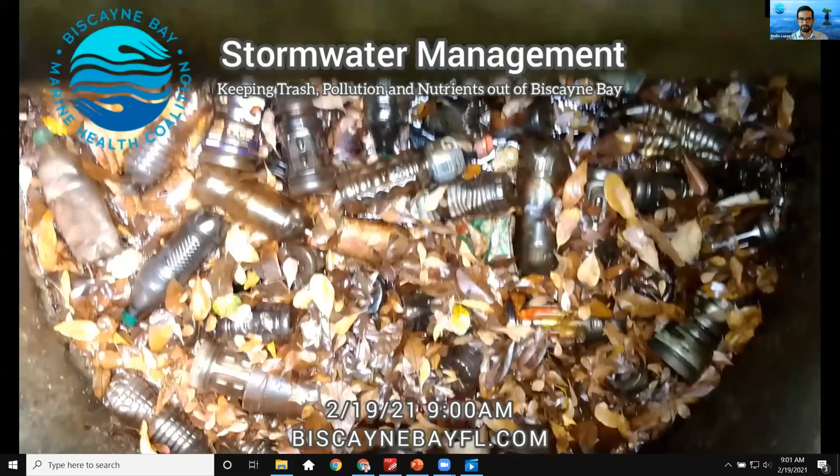So everybody knows, Dave and I started working on this a couple of months back, and we started speaking with all of the different panelists that you'll see today. I'm going to stop sharing this video in just a second, but I wanted to keep it out there because a picture is worth 1,000 words, right?

These are actually local storm drains. I took this video myself, just walked up to some of these drains, just to give a quick sense of what we're talking about, some of the things that we can actually see ourselves. A lot of the contaminants that get into our stormwater systems and eventually discharge into Biscayne Bay, we cannot see. But these are the things that we can see.

Something that's a curious thing that I wanted to highlight with these videos is that a lot of what gets into the storm drains is actually organic matter, like leaves for example. You're seeing a lot of plastics and trash in there, but there are a lot of leaves. And that also contributes to pollution in the form of nutrients, right? That's not supposed to be in the bay. But we're going to get to all of that in just a second.

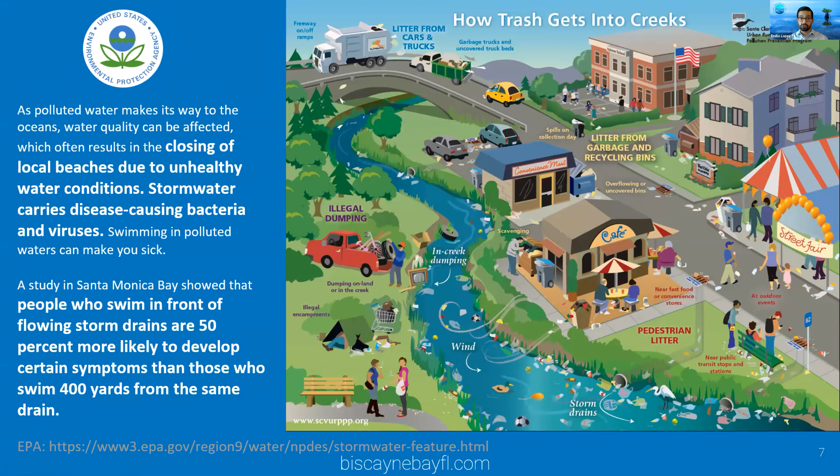We know that it comes from a lot of different sources, right? It causes a lot of different issues. I'm going to assume that most of you know a lot about this, so we're going high level here. Another very important thing is that a lot of the trash is in the oceans. We all know about this, we talk about it, we see these dramatic images of fish that have plastics in their gut. We know that humans are consuming that as well.

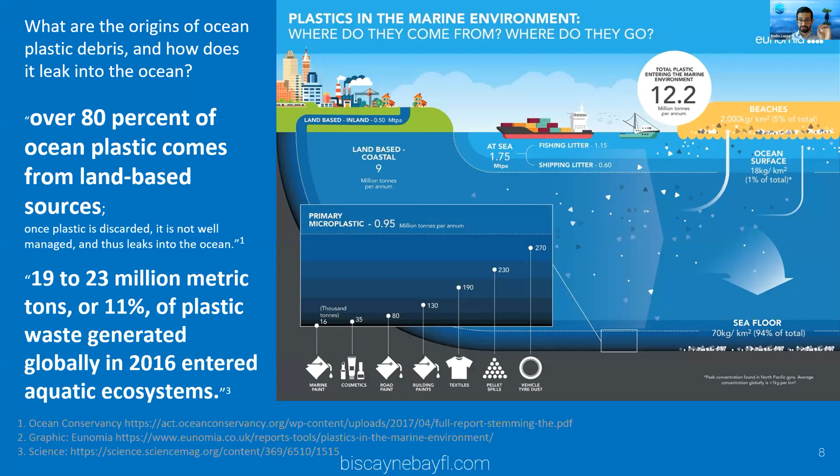A lot of it comes from land, right? And in a way that's an opportunity, an opportunity that we have to address the problem on land. 80% of it, this is only talking about plastics. I know it's a narrow focus of this slide, but that just gives you a sense of the issues.

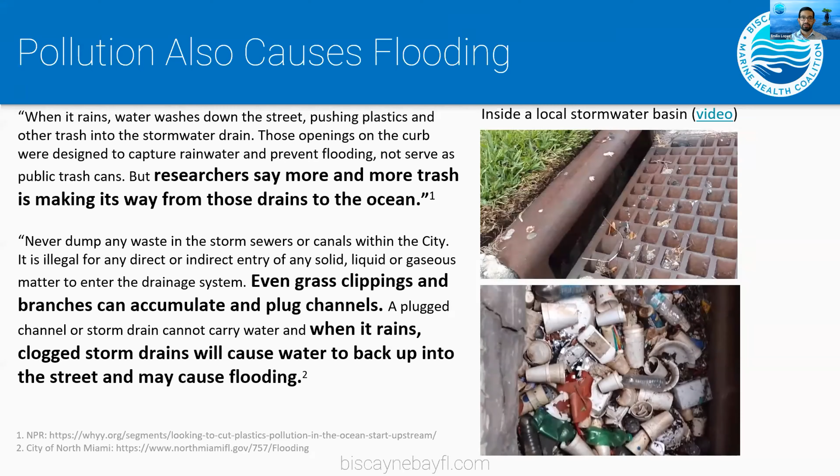We also know that this trash and litter clogs up the pipes and it leads to flooding. One of those quotes you see down there in bold is from the City of North Miami website. This is a very, very well documented issue, that pollution is not only an issue from a health perspective or ecological perspective, but also financial and other impacts like flooding.

Like I mentioned before, a lot of what we capture is leaves, nutrients contained in there. There's also a lot of street litter. If you were to quantify per inlet, very rough estimate, we're talking over 100 pounds of trash every single year for each one that's going in there, trash and also debris like leaves, which again is a problem. If we look at 95,000 plus storm drains in the county, we're talking about potentially 16 million pounds of leaves and trash entering the storm drains.

Not all of that gets out into the bay. Not all the systems are connected to the bay, but this gives you a sense of the magnitude of the problem. And if you break this down using the Florida DEP nutrient load calculator, this represents a lot of phosphorus and nitrogen, many pounds of that. That's very important, you'll hear why pretty soon.

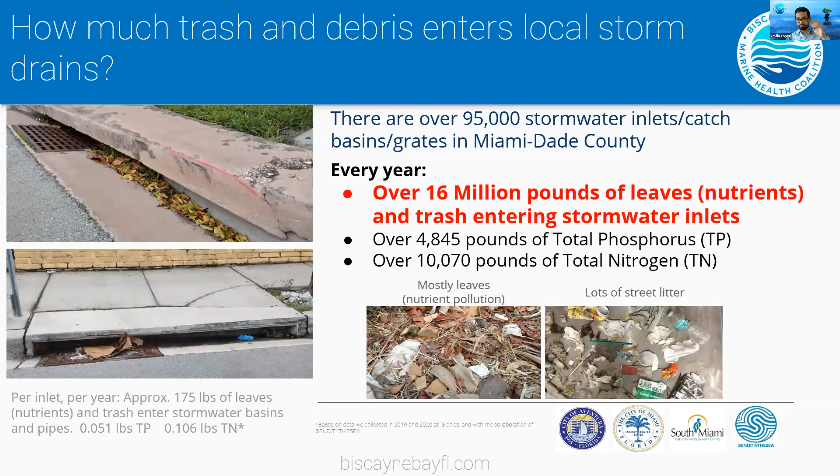We know that we have a moral responsibility to protect the bay, and public works officials also have an opportunity because they can have a lot of impact in order to do this, and they want to do this. When I talk to public works folks, they know about the problems, they want to address them.

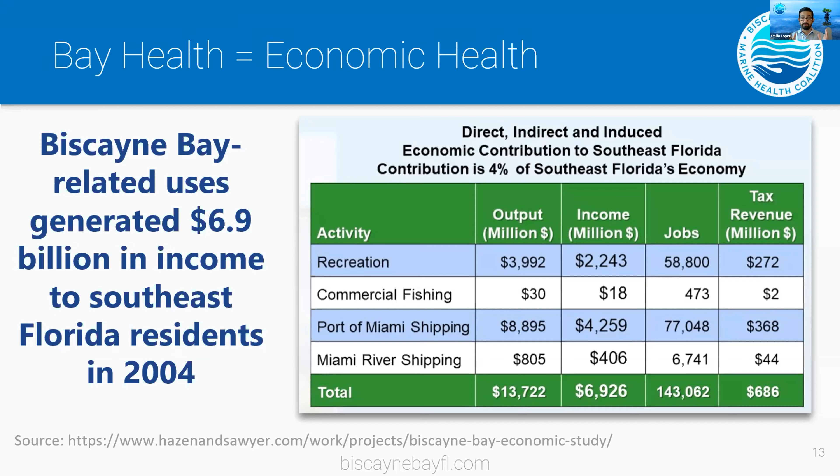Another reason why this is important is because for us, Biscayne Bay is the driver for our economy. This is a very old study, from 2004. Look how many billions of dollars we're talking about, we're talking about a lot of jobs. So when you think about protecting Biscayne Bay, it's not only about human health, it's not only about environmental health and our ecology, local ecosystems, it's not only about having fun. It's about protecting our jobs. It's a very, very vital part of our economy.

And what are some public works departments saying? Six months ago, before a town hall which we did via Zoom for the coalition, I asked public works departments via a very brief survey what are some things that you would like to take action upon from the Biscayne Bay Task Force recommendations during the next 12 months. And you can see here from the responses that public works departments want to take action.

Okay, very action focused. You see highlighted in red, these are two of the, I think, 62 different recommendations from the Biscayne Bay Task Force at the county level that got a lot of little check marks there. That's public works departments saying that we definitely want to take action on these things as well as the others.

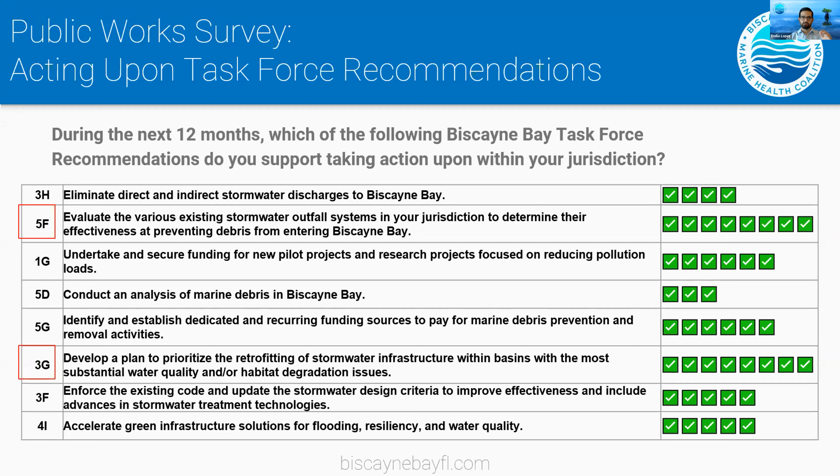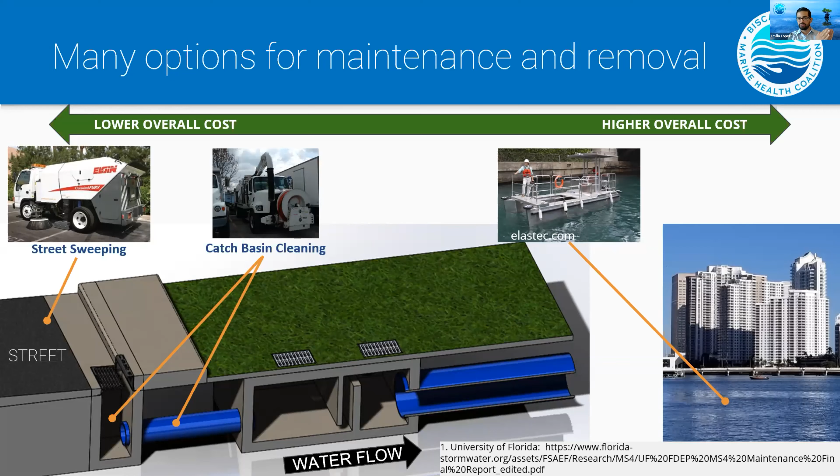Not all the systems discharge to the bay — I want to make sure everybody understands that. This isn't a representation of all the different maintenance practices, but in general, the closer to the street, to the source, that you're able to capture this trash, the cheaper it is, the more economical. The further out you go, the more expensive. There are many different solutions.

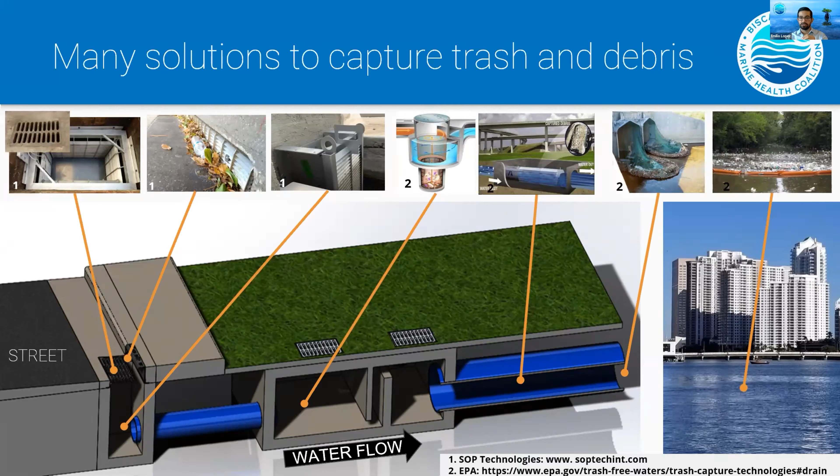Some solutions are intended to keep the trash at the street so you can capture it at a much lower cost. For many reasons, you want a variety of solutions, and you'll hear that from public works departments. These solutions are out there so you can capture and remove trash at various points. I'll go through this quickly.

Another important thing is that locally, there are many organizations supporting the protection of Biscayne Bay. So if you're a public works official asking where's the support, who is supporting me in making these investments and taking this action — there are many groups. You can visit our website, where we have a listing of several of them with contact information, so you can connect with them and be supported, because we are supporting.

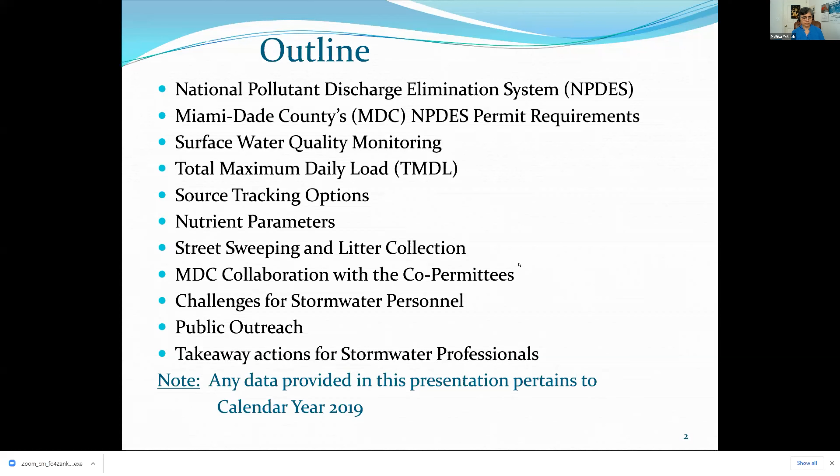The NPDES permit is issued by the Florida Department of Environmental Protection, FDEP, and FDEP is the regulator. Miami-Dade County is not the regulator. The permit is issued to Miami-Dade County and 32 co-permittees. The co-permittees are the municipalities, FDOT District 6, MDX, and Florida Turnpike Enterprise. City of Miami and Hialeah have their own permit. Each co-permittee submits their NPDES annual report directly to FDEP.

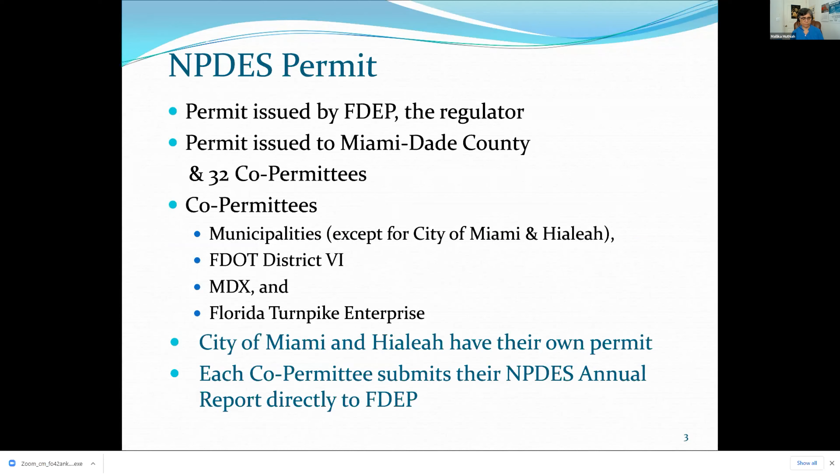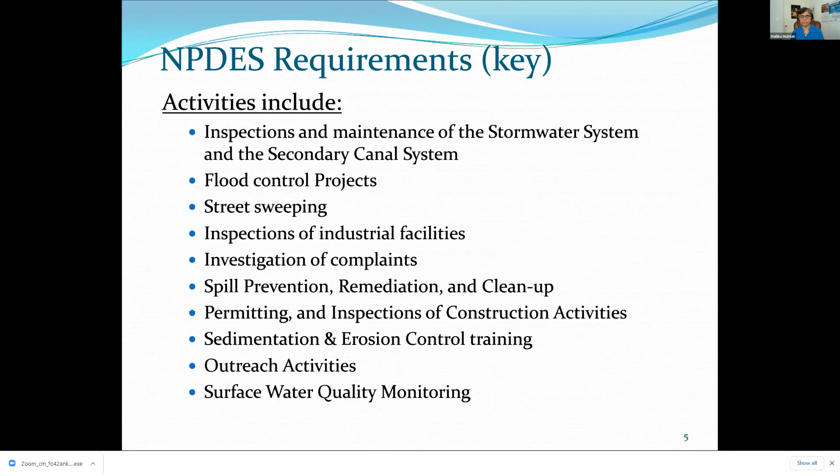In the county, NPDES activities are primarily performed by the Department of Regulatory and Economic Resources, RER, Public Works, Water and Sewer Department, Solid Waste Management, the Parks Department, and Florida Yards and Neighborhood. The permit activities for the NPDES permit include inspections and maintenance of the stormwater system and the secondary canal system, flood control projects, street sweeping, facility inspections, complaint investigation, permitting and inspections of construction activities, sedimentation and erosion control training, outreach activities, and surface water quality monitoring.

These are the stormwater structures that can be found in Miami-Dade County. Maintenance activities are performed by Public Works. Engineering, planning, and inspections are conducted by DERM.

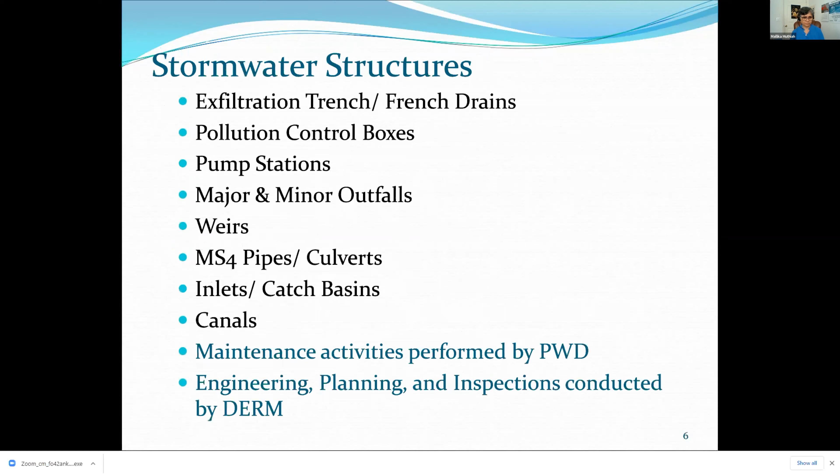The stormwater infrastructure is inspected annually after storm events and for complaints. The following maintenance schedule is followed unless an inspection finds an immediate risk after storm events: French drains, trenches, catch basins, inlets, and drainage pipes are on a 3 to 5 year cycle. Outfalls are maintained on a 1 to 2 year cycle. Pollution control structures are maintained annually. Secondary canals are maintained with 4 cycles per year, and pump stations are maintained weekly.

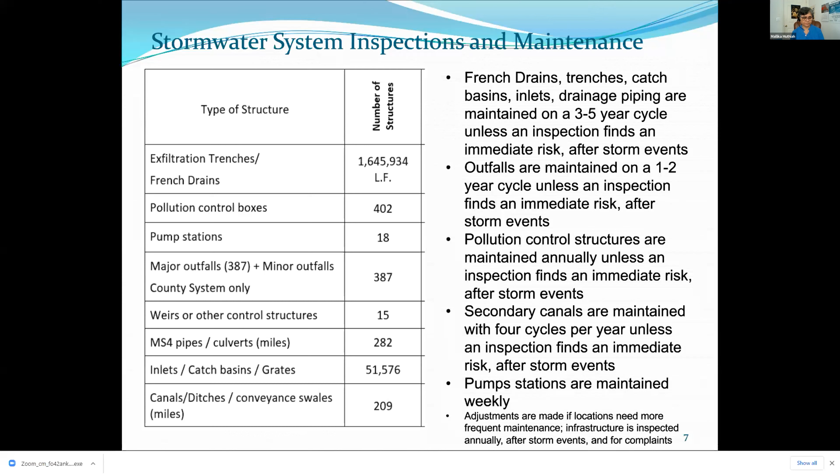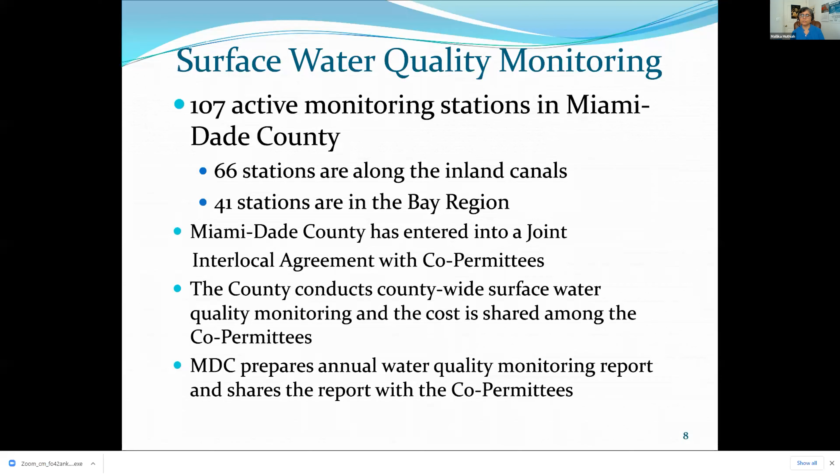There are 107 active monitoring stations in Miami-Dade County. 66 stations are along the inland canals, and 41 stations are in the Bay region. The county has entered into a joint interlocal agreement with the co-permittees. The county conducts county-wide surface water quality monitoring, and the cost is shared among the co-permittees. The county prepares an annual water quality monitoring report and shares the report with the co-permittees.

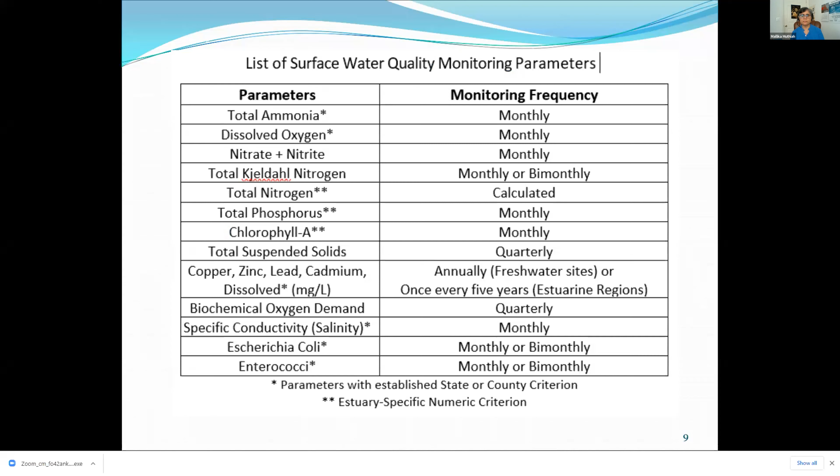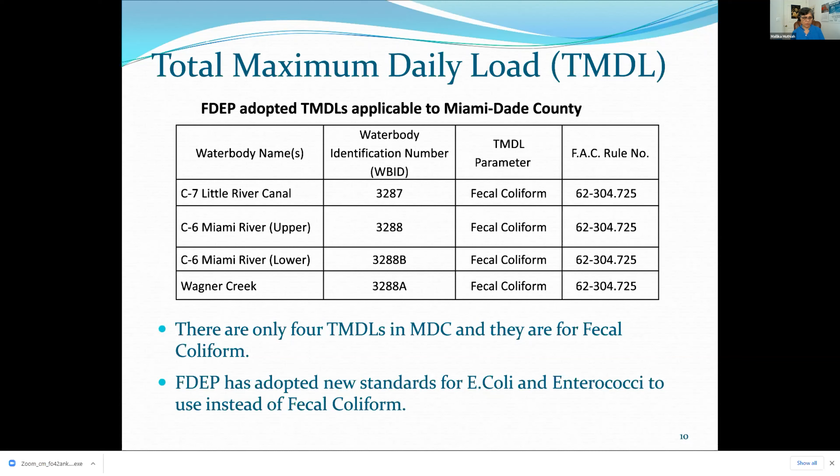What do we do when we find high concentrations of a pollutant detected in a water body? The source of pollution must be identified and then eliminated. There are a few options available, and a combination of these options will be better.

Walk the outfall. Walk close to the water body and visually observe if there are any illicit discharge pipes to the canal or other potential sources of the pollutant. In the neighborhood, observe if there are any notable odors, outdoor markets or produce packing facilities, homeless population, open garbage dumpsters, birds, restaurants, medical facilities, or any facilities out of the ordinary that may be a potential source of the pollutant. Direct or indirect runoff from certain sources could cause pollution.

Additional water quality monitoring of the discharge points, the outfalls. If sampling results indicate high concentration of a parameter, continue upstream and collect samples in the stormwater structures. If you still find high concentrations, continue upstream until the pollution source is located.

Use GIS drainage maps. Source molecular is a DNA testing method for bacteria pollution, used to identify if the source is human, animals, birds, etc. Closed circuit television CCTV monitoring can also be used to look for damaged pipes, illegal connections, and cross connections between sanitary sewer and storm sewer.

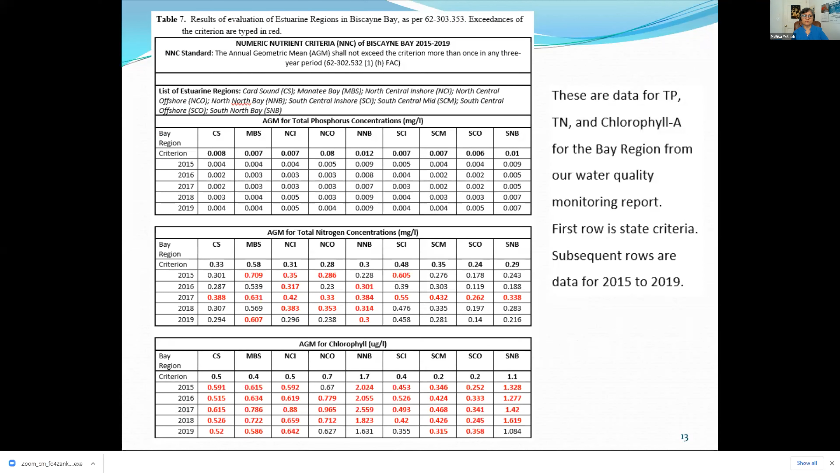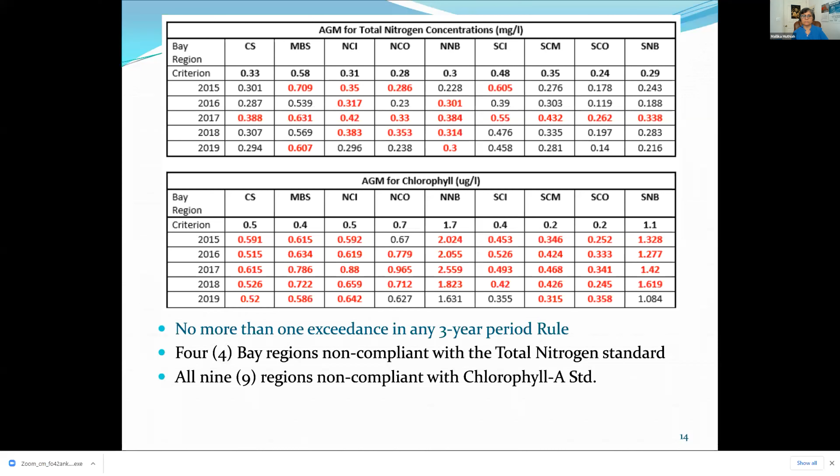This is the table for total nitrogen and chlorophyll A. No more than one exceedance in any 3 consecutive years is the rule. There are 4 Bay regions that are non-compliant with the total nitrogen standard, and all 9 regions are non-compliant with the chlorophyll A standard.

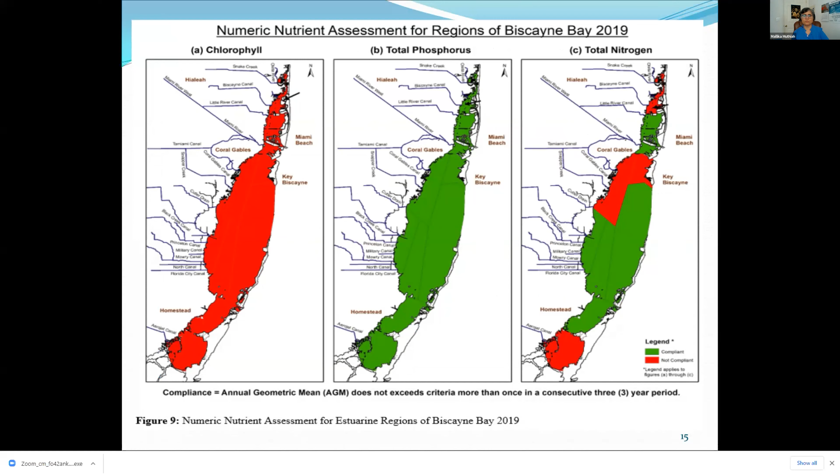These figures indicate numeric nutrient assessment: the first one is chlorophyll A, the second one is total phosphorus, and the third is total nitrogen.

Trash and nutrients must be captured prior to entering the bay. The most economical option is not to let trash and debris get into the bay.

Litter collection and litter control is performed under contract through the Parks and Open Spaces Department. The roadways contract deals with medians, roadside curbs, and swales. They maintain 1,060 miles, 20 cycles a year, with 780 cubic yards of litter collected.

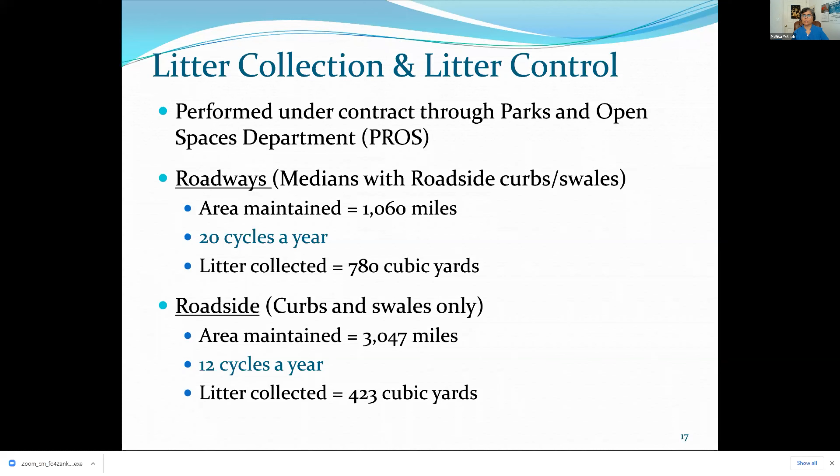The roadside contract is for curbs and swales only. Area maintained is 3,047 miles, 12 cycles a year, with 423 cubic yards collected.

Miami-Dade County collaborates with the co-permittees. The surface water quality monitoring data and report are shared with the co-permittees. The county compiles facility inspections, complaint investigation, and enforcement related information and provides them to the co-permittees for use in their annual report. The county also organized a co-permittee meeting with FDEP staff as the guest speaker prior to obtaining our current Cycle 4 permit.

The county shares sample documents and responds to questions from the co-permittees regarding NPDES requirements. It also shares public outreach brochures.

The challenges we face as stormwater professionals include public awareness and excessive water and fertilizer use for landscaping. Switching from septic systems to sanitary sewer connection may be costly. Identification of the specific source of pollution may be difficult and expensive. Deteriorating infrastructure may cause sanitary sewer overflows.

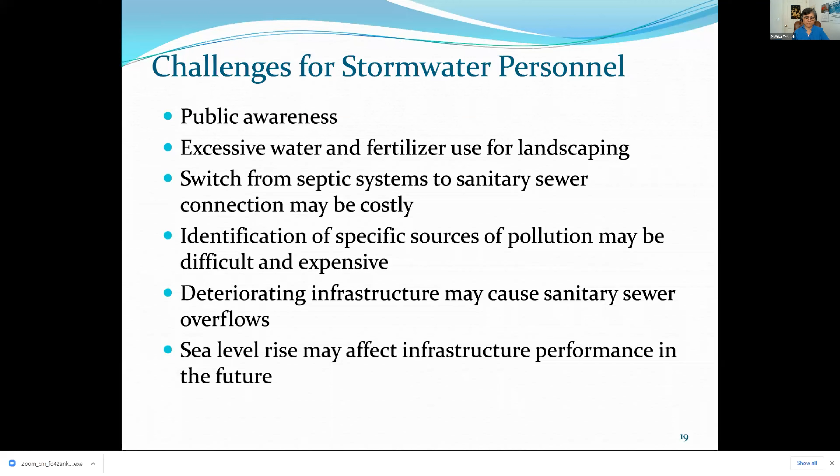Sea level rise might affect infrastructure performance in the future. Involvement of multiple stakeholders means progress. It is important and will help in better understanding the sources of pollutants, and it enhances environmental awareness and responsibility.

So what are the takeaway actions for us? Enhance street sweeping operations, enhance stormwater infrastructure inspections and maintenance, allocate funds and incentives to facilitate switching from septic systems to sanitary sewer connections, apply source tracking methods to facilitate identification and help eliminate pollution sources, reduce the number of sanitary sewer overflow incidents, promote low impact development and green infrastructure.

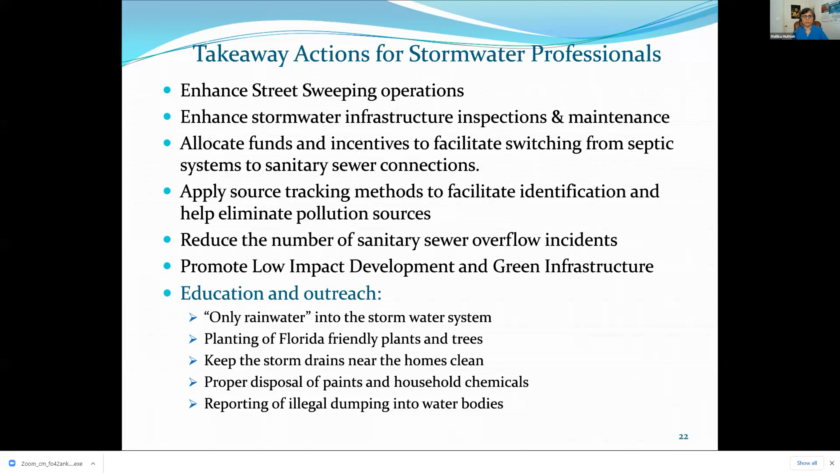With regards to education and outreach: only rainwater into the stormwater system, planting of Florida friendly plants and trees, keep the storm drains near the homes clean, proper disposal of paints and household chemicals, reporting of illegal dumping into our water bodies or stormwater structures.

Other information is available for flood complaints. Call the Water Management Division at 305-372-6529 or email swu@miamidade.gov to report illegal connections, dumping of any liquid or materials into storm drains or water bodies. Call the Environmental Complaint Desk at 305-372-6955 or email environmentalcomplaints@miamidade.gov. That concludes my presentation, and I appreciate the opportunity to present these slides. And thank you very much. Be safe and well. Thank you, Mallika.

Very much appreciated. So in the questions and answers section from the participants, there's one question that really rose to the top, a lot of people gave thumbs up to it, so I wanted to ask you and get your thoughts. Since plastic pollutes from the time it is produced, not just when it is littered, is Miami-Dade County going to pass more policies that will reduce the amount of single-use plastics and polystyrene foam used, distributed, or sold?

That needs to be dealt with at a very high level. And I am very happy that we have a chief bay officer to handle these issues. But it's a very important question. It is done in several municipalities and other areas. I would be very happy to see something like that. Maybe our chief bay officer can help us with this question.

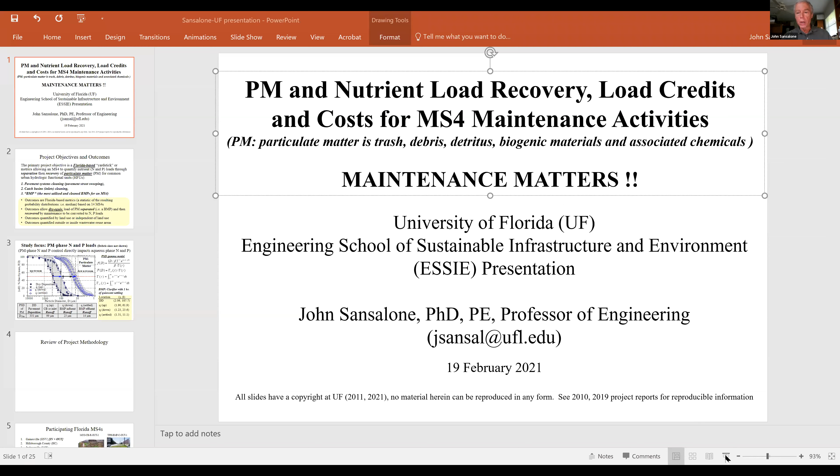Okay, can everyone see my screen? Not at this moment, huh? So what do I need to do on my end? On the bottom it should say screen share, and then you can select either a specific app, or you can just share your entire screen, which is probably the easiest thing to do. No, when I do this now, I get who can share and who can start sharing. Hold on, hang on, let me go through it this way. Okay, I'm seeing something happening. It looks like, okay, yes, now we can see it. All right, good, good, good, good. All right, I'm gonna go to full screen here. All right, so

My introduction today is mainly about the science of maintenance that has been such a critical discussion today. I'm going to talk about particulate matter and nutrient load recovery, load credits, and cost for maintenance activities. I'm abbreviating and lumping everything as PM, particulate matter. This includes trash we've seen in the pictures, debris, detritus, biogenic material, leaves, grass clippings, etc., and critically, all of the associated chemicals. Here our focus is nutrients. I want to put the summary up front, and the summary comes down to two words: maintenance matters. In this presentation, I'm going to document that, especially from a cost point of view.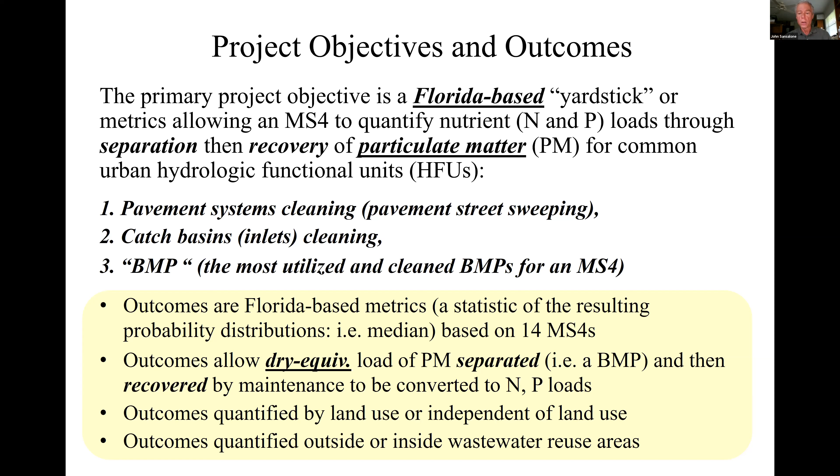But the point is, especially for nitrogen, if you are able to recover that particulate matter upstream through pavement cleaning, you have done yourself a significant favor before it ever enters the stormwater system, or before you have to clean it out of a best management practice. Frankly, many of the best management practices we deal with are certainly not best. They're poorly managed and they're poorly practiced.

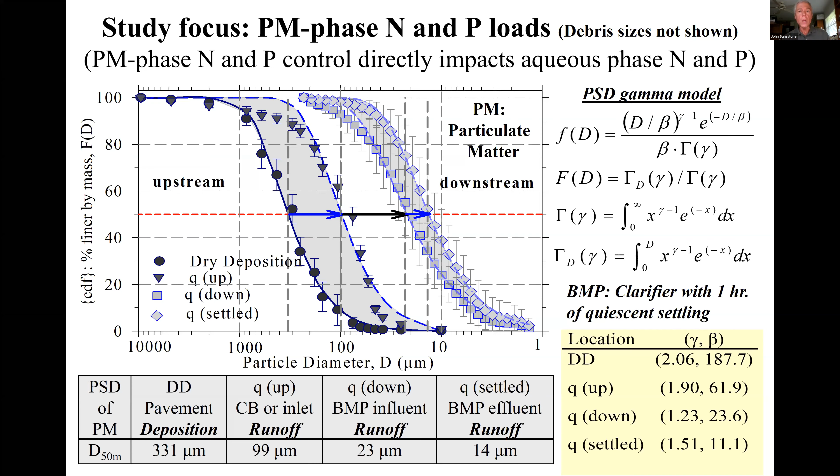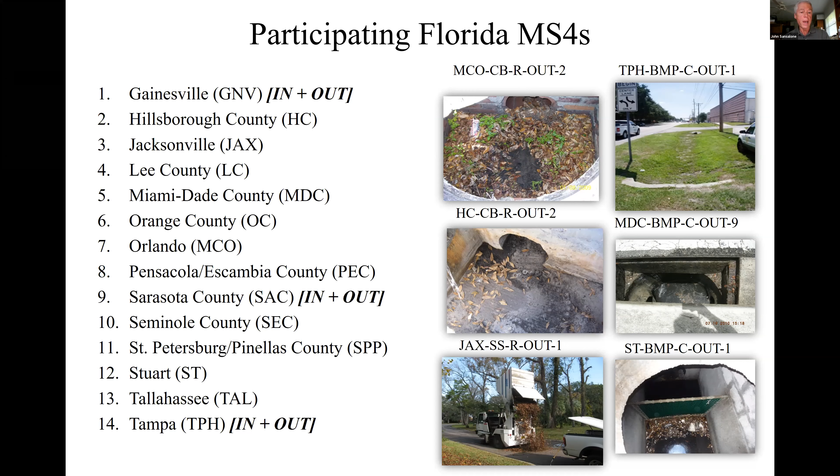We had a sampling process, a lab analysis, and we collected in the second study 500 and some samples from across the state. They were all brought back to our labs for analysis, and we created 300 and some samples in the last phase. So we have a huge database.

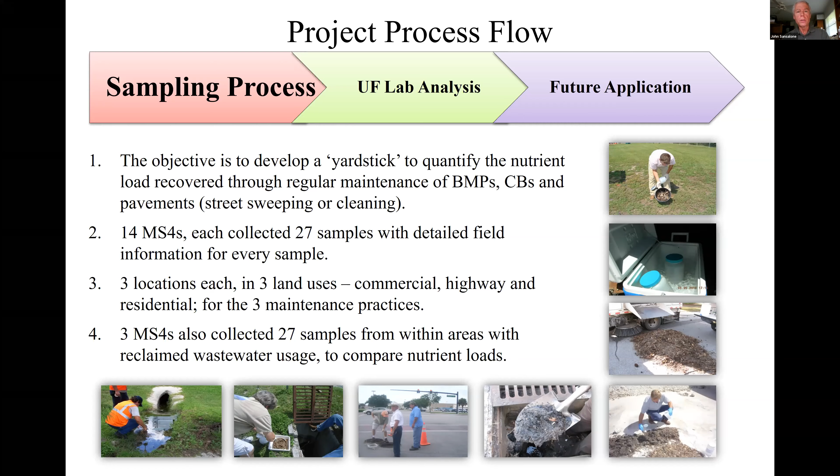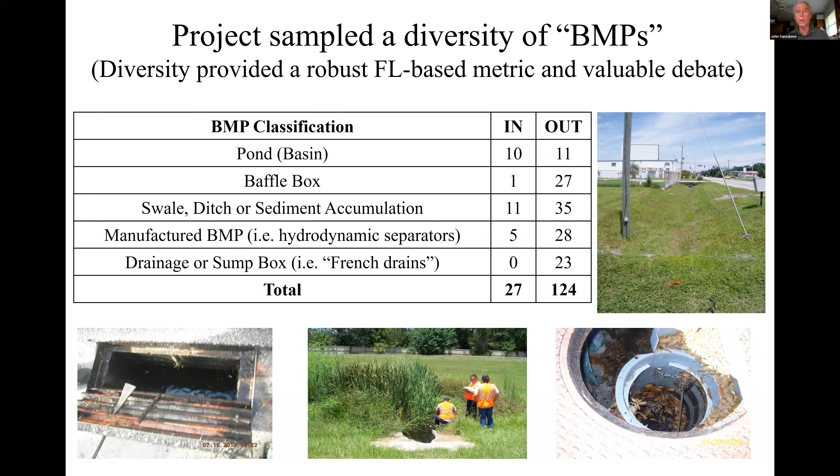In the second study, our BMP classifications between inside and outside of wastewater reclaimed areas are shown here. We pushed back a little bit with DEP, maybe back in 2008, 2009, because they wanted us to focus strictly on ponds, or what I prefer to call basins. We said no, we want to focus on a diversity of BMPs. Whatever BMP that municipality is maintaining the most, we want to focus on so we can get them N and P load credits in their basin management action plans. Eventually FDEP said yes, we agree.

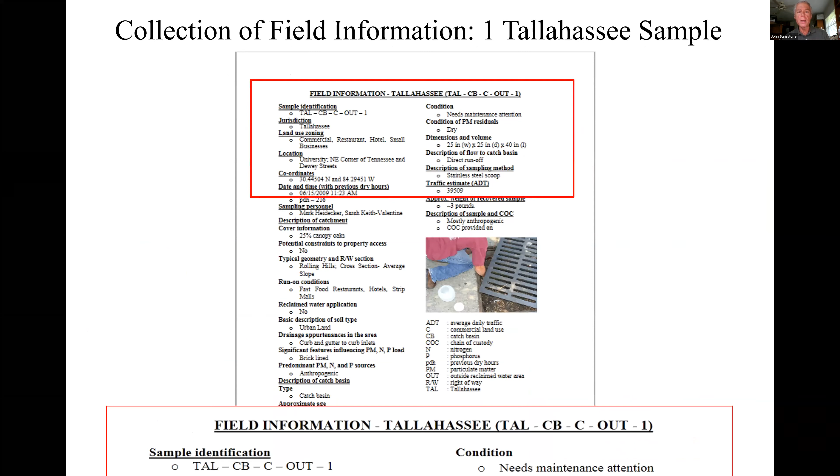So there was a whole process of QA, QC. There were databases for each municipality. Exhaustive databases provided, and all of those have been tabulated. They have been available, but in the end, we created statistics and probability distributions from the data sets for total phosphorus, total nitrogen, extractable phosphorus. We did this all in our NELAC certified labs. The science is rock solid.

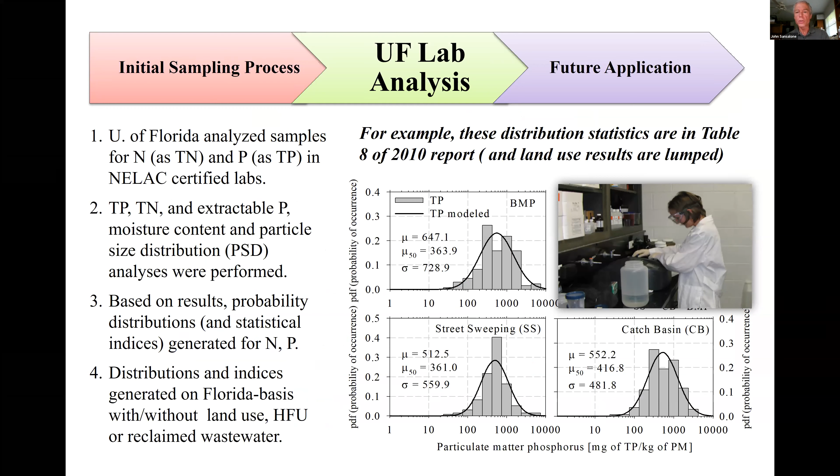In addition, we looked at what this means if we capture particulate matter from street sweepings. For example, 150, 60 kilograms of particulate matter per mile swept. We create a yardstick relating that to total phosphorus. Since typically street sweeping vehicles are tared initially and then weighed afterwards, we can document the dry equivalent PM as long as we subtract moisture contents. Now, many municipalities don't use mass, the weight of the truck, they use volume. So we have also established a way to convert a volumetric measurement to a gravimetric measurement.

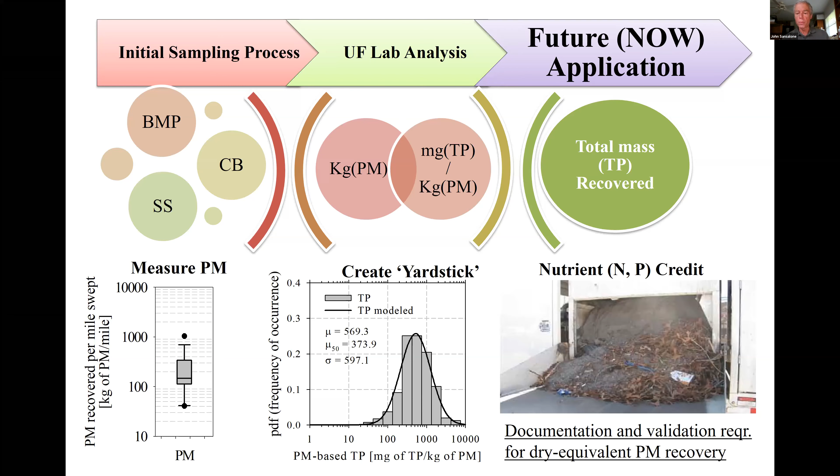So what are the results? We looked at these in terms of highway land uses, residential land uses, and commercial land uses. You could make an argument for other land uses, but these were the land uses that we examined.

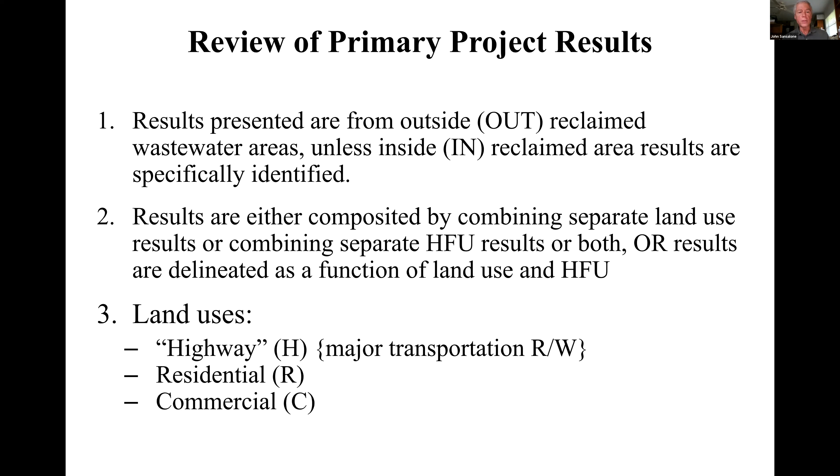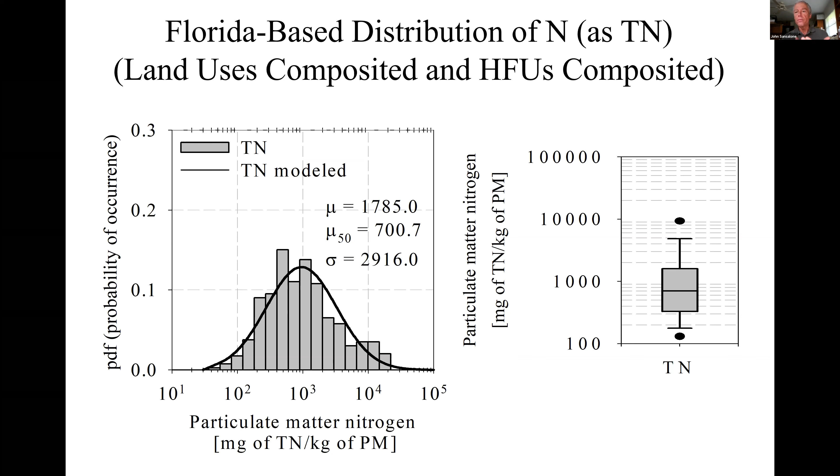So this is a typical result: a probability distribution, a frequency distribution, here milligrams of total nitrogen per dry kilogram of particulate matter. The data are log normally distributed. That may not mean much to some, but basically what that says to us is we need to use the 50th percentile of the data for load credits in basin management action plans. In the spreadsheet we created, the tool, the 50th percentile statistics are embedded. So we did this for BMPs, we did this for street sweeping, we did this for catch basins, and we did this across land uses.

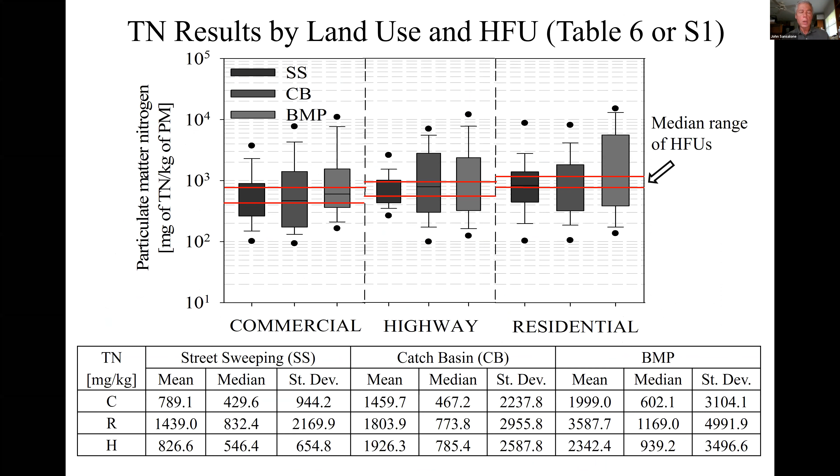So you can imagine, to be statistically significant, this database had to be large, and it was. So here are land uses. Here are our tabular and non-parametric data.

One of the issues that came up is, should there be a numerical offset for loads recovered from inside reclaimed wastewater areas versus outside? As of the last report, this answer is not definitive. Intuitively, I expect that answer to be yes, but we really do need a more highly controlled project across Florida, given that Florida is a leader in reclaimed wastewater.

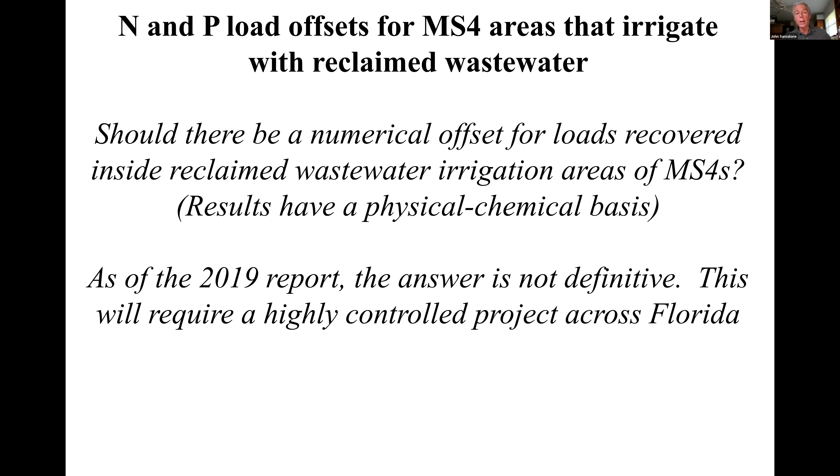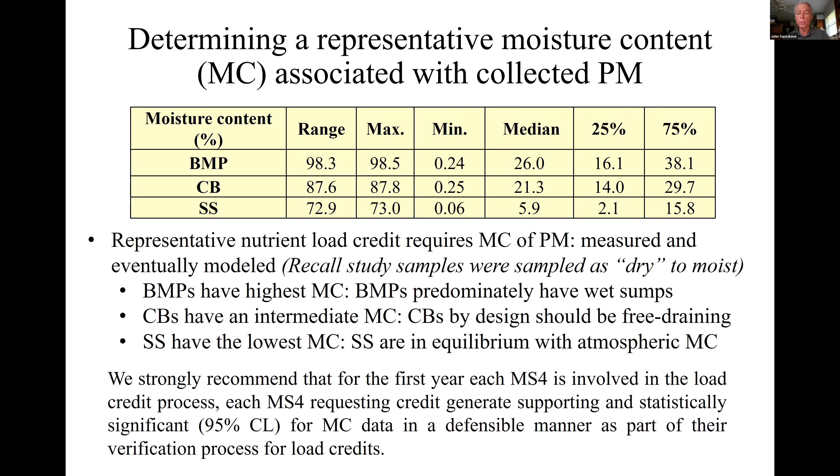Moisture content requirements: for us to go into the lab and measure moisture content is very straightforward. For many municipalities, this is burdensome. So we went out and we measured moisture contents. We picked the median, the 50th percentile. For BMPs, there's a 26% moisture content. Catch basins, 21%, and street sweepings, 6%. I was very adamant about using these in the updates from the 2019 report, because a municipality cannot take credit for moisture. The moisture content must be subtracted to get the dry equivalent loads.

Also, FDEP pushed back against the argument that Florida basins are in the same population as other BMPs in this study. I presented this slide to them and they didn't grouse at me too much. But in fact, there is both a physical and statistical basis for including basins with other BMPs from a partitioning point of view. Partitioning here means milligrams per kilogram of a nutrient.

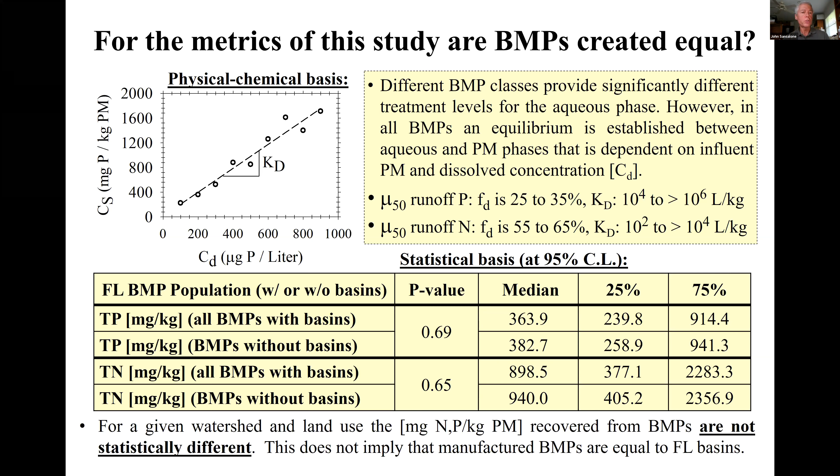The benefits of basins are hydrologic controls. Most BMPs, especially manufactured BMPs, provide no hydrologic control. So from that point of view, hydrologically, they are different. But from a partitioning point of view, they represent the same population.

I don't have time to go through actual numerical examples. My advice is both reports are publicly available. Take a look at, in particular, the 2019 report. But the upshot of maintenance is in the next two slides, which are my last two technical slides before conclusion. If you do not maintain your system...

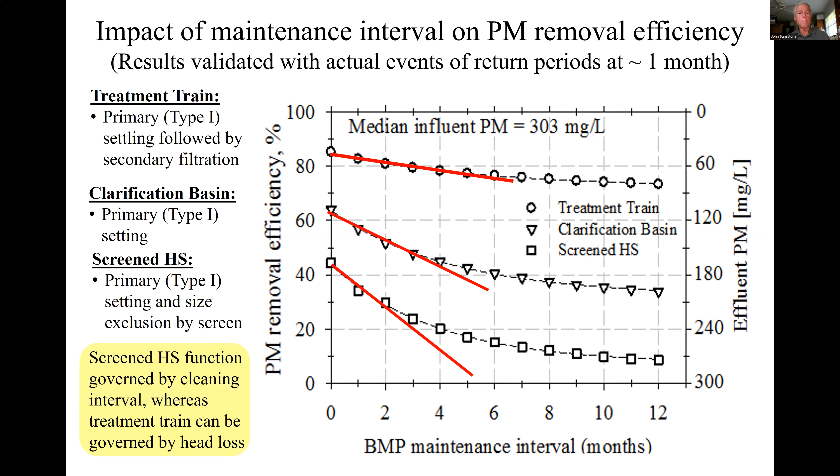And finally, if you didn't need more of a rationale for maintenance, look at the cost of separation and recovery. Let's just pick on total nitrogen for this purpose. BMP treatment trains, about $935 per pound of TN recovered.

The Florida database for BMPs from FDEP, that goes up to $1,900 per pound. If I looked at screened hydrodynamic separators, now we're over $3,000 per pound. If I go to maintenance activities like street sweeping, I'm down to $165 per pound, and catch basin cleaning at $1,000 per pound.

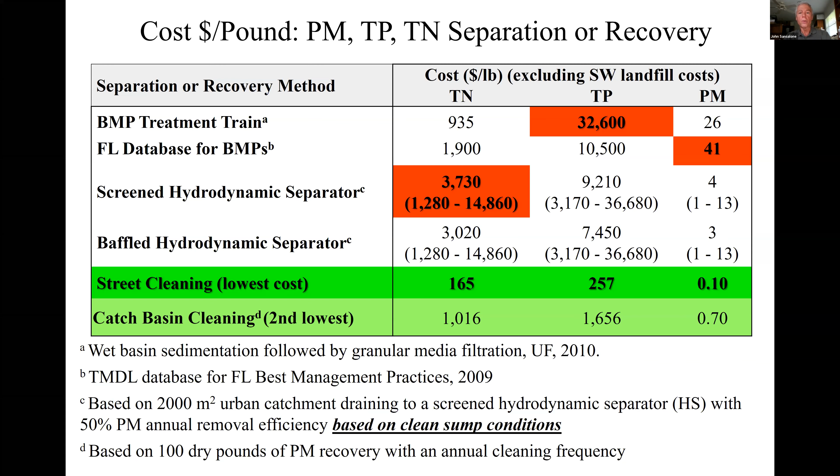Why wouldn't you implement maintenance practices? Building all the BMPs in the world are not going to solve the problem, and you don't have enough dollars to do so. Thank you, John. It's great.

Conclusions, okay. So bottom line is, I know this is a little nerdy, but the data are log normal. Therefore, you use the 50th percentile. That's what I built into the spreadsheets.

The results are important for load allocations and load credits. But note, there is no singular concentration, but a log normal distribution, and we use the 50th percentile. There is still debate about the enrichment from reclaimed wastewater. If you ask my professional point of view, there is enrichment, but we need more work.

Cost of load recovery is just significantly lower than current manufactured BMPs, even if we assume that these BMPs are maintained annually and do not scour or wash out. Moisture content is a critical parameter. You must account for that. Just a nerdy thing, but you have to.

Maintenance is far superior to manufactured BMPs that have been used, and basins have hydrologic benefits over these manufactured BMPs.

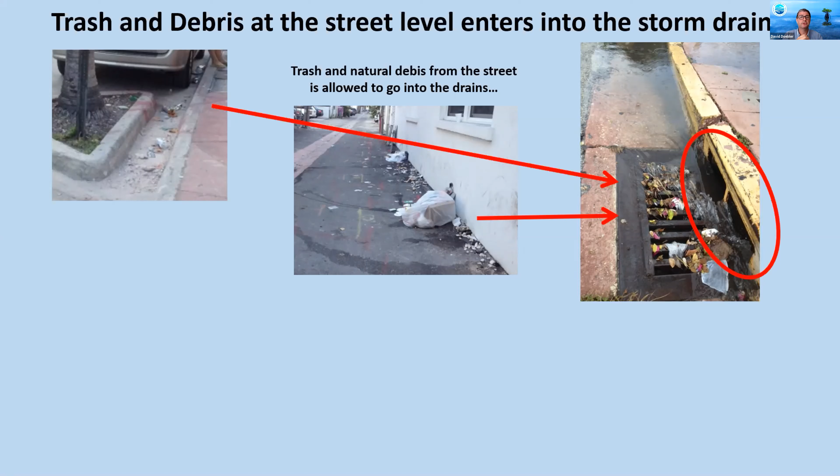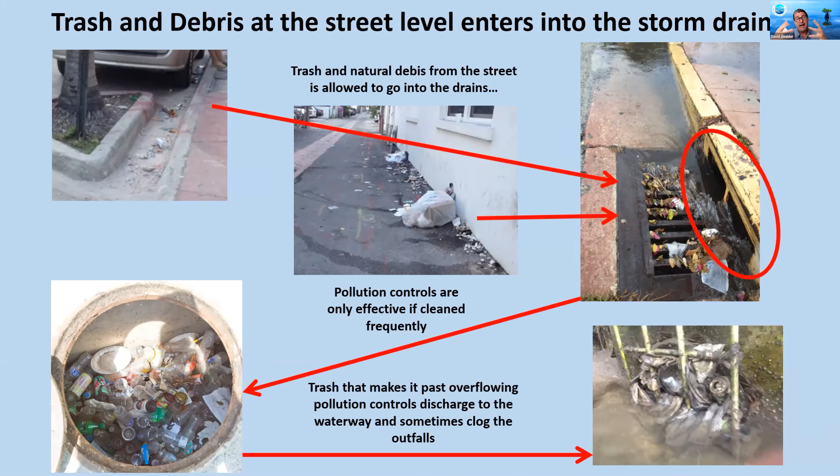That's the same stuff we all find walking around the streets. And I discovered it was coming through storm drain systems. To be honest, I didn't even realize this before I got into this space. I don't know that I necessarily correlated street litter with litter in the environment. I always used to think it was boaters and cruise ships and stuff like that, but that's not accurate. Street litter, which is both plastic trash and natural debris, goes into the storm drains when it rains, and pollution controls capture this, but they're only effective if they're cleaned frequently. Trash that makes it past the overflowing pollution controls discharges into the waterways. In this picture here, you can see where I kind of made that connection. This was a picture of a stormwater outfall that was completely clogged with trash, and that was contributing to the flooding we were experiencing here in Miami Beach.

So the goal of this webinar is to highlight current and future opportunities to keep trash and nutrients from going into Biscayne Bay via the stormwater system. Recognizing that I don't know what I'm talking about in the grand scale of things, I'm not a public works professional, I wanted to highlight three entities that have been focused on this issue and increasing their protection of Biscayne Bay through active stormwater design and management.

So today we're going to have a panel conversation with Anthony Mihalko, who is with the City of Aventura, Alan Dodd, who's with City of Miami, and Nelson Perez Hakame, who is with City of Miami Beach. We already asked the poll questions, but each of these panelists is going to give a quick overview of their stormwater program. We've asked them specifically to tailor their conversation, maybe 5 to 7 minutes, on their current stormwater infrastructure, their maintenance program, and their future plans and goals.

So what I'm going to do is ask Anthony to share his screen and get us kicked off, giving us a quick overview of what City of Aventura is doing.

Okay, let me get my screen up. Share.

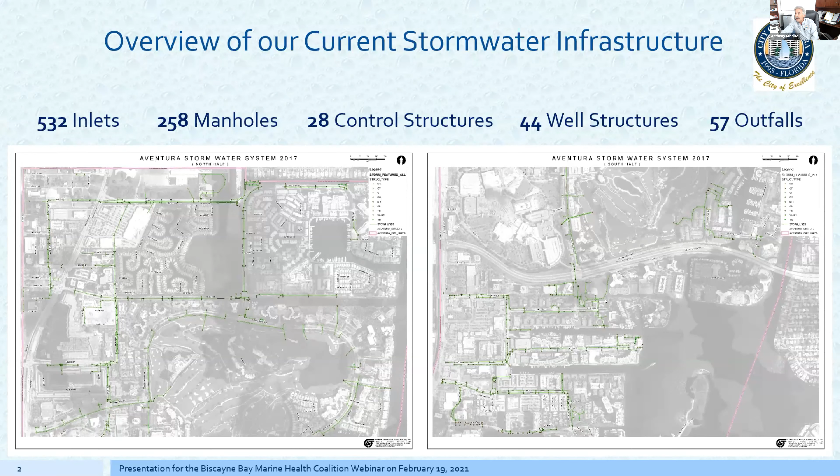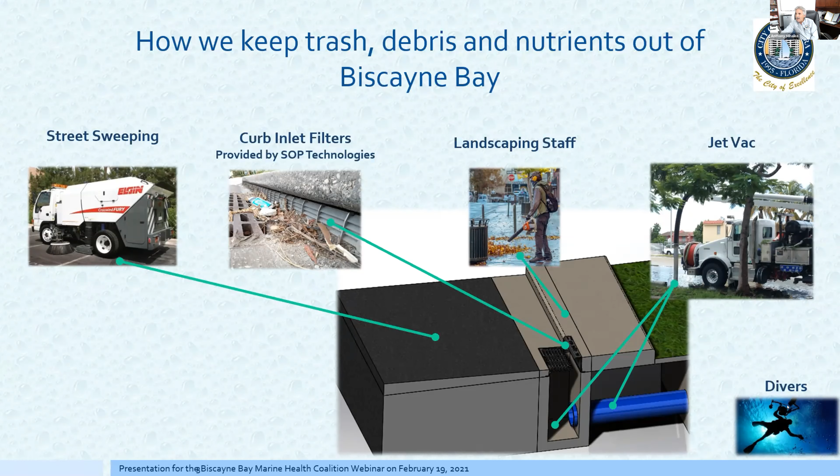The way we keep nutrients out mostly is street sweeping, the curb inlet filters provided by SOP Technologies, landscaping staff, and jet vac. In one instance last year, we actually used scuba divers to help clean out one of our pipes.

As far as maintenance, we do street sweeping once a week from March through August, and bi-weekly September through February. We picked that period because the majority of the rain falls mostly through March and August, so we don't have as much to collect September through February. Annually, last year we collected about 217 cubic yards at a cost of $40,000. US Sweeping is the company we're currently using.

We actually had to fire our old street sweeping company once we started putting in our curb inlet grates, because I started noticing what a poor job they were doing. Our frequency was once a week, and we were collecting so much debris in the street that our old sweeper just did a horrible job. Our landscapers used to chase them down the street because debris would be flying out the back of their truck, and they were just very ineffective.

So we looked around for another company and chose US Sweeping, and they've done a fantastic job for us so far. Our landscape staff, we currently use Brightview Landscaping for all of our right-of-ways, and as you can see, they're our number 1 collector of debris with over 791 cubic yards. We have about a $1 million annual contract with them, but I'd estimate about 5% of that goes towards trash and litter pickup.

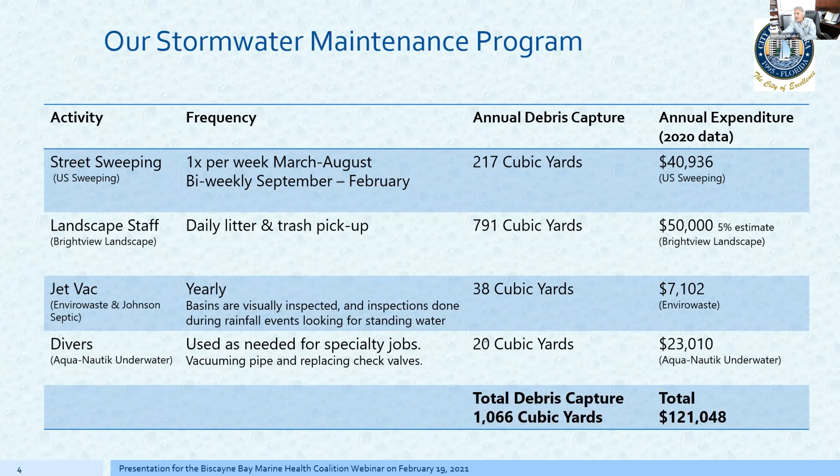Our plans and goals for the future: back in 2017, our director, Joseph Kroll, created an ordinance for providing enhanced stormwater management. Basically, that gives us permission to ask all commercial properties, on a biannual basis, to submit reports to us proving that they are doing some type of inspection and maintenance on their own systems.

We were never doing that before, but now this really helps contribute to our accountability of keeping debris from going into the storm drain system. And starting in 2021, we are also going to be including all the condominium properties.

We continue working with our building department for all the demolition projects. We have a lot of buildings lately being torn down and new ones going up. Before they start, we make sure all the silt fencing is up, filter socks and filter fabric placed around drains, and we make sure that before debris is hauled out, they have a proper washdown area.

Before they even get started on a project, they have to get approval before the other building inspections take place. Our main obstacle is basically budget. But if money wasn't an issue, I'd like to see wireless monitors in each catch basin to help determine the amount of debris inside, to make it simpler for us so we can know when we have to schedule a jet vac cleaning. And that's pretty much my presentation.

So how do we keep pollutants out of Biscayne Bay right now and really protect our environment? As I talk through these different measures, I think it's already been mentioned once, it is more cost effective as you get inland and stop it at the source of the pollution before it gets into the stormwater system. And then it gets more expensive as we are dealing with the system, getting into pump stations and outfalls and trying to clean it, or even worse, cleaning it in the bay itself.

But one of the biggest things that we do is street sweeping. We have a number of vehicles that operate under the stormwater and solid waste department, pretty much on a 7-day, 365-day schedule, daytime and nighttime. We cover about 60 miles of our city roadways, which is a fraction of the total roads. But they are on a routine schedule, and some areas are swept as frequently as once a week in order to deal with the trash and debris that we pick up.

We also know that we have a lot of debris that gets into the system, so we have a waterway cleaning contract that's about $250,000 a year that is removing floatables and performing oxygenation, bringing oxygen into the water using a Scavenger 2000 vehicle.

And it's very, very effective at trying to pick up debris that's already at the bay. Not the best place to capture it, but better than letting it remain out there.

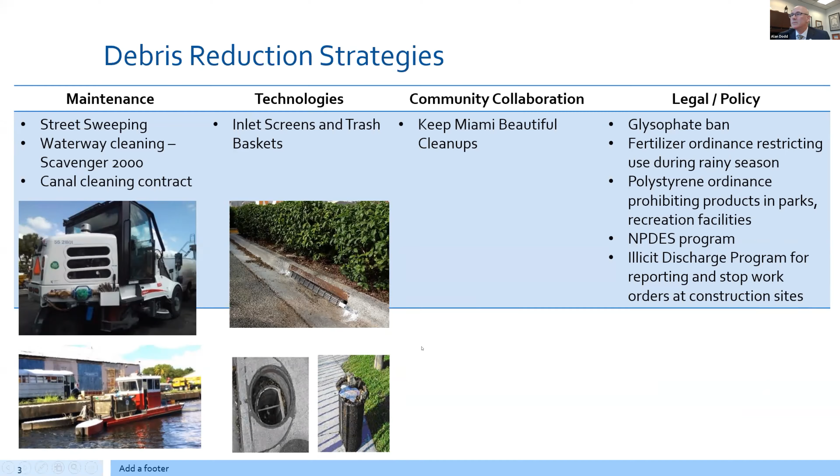Okay, so our total program is a little over 14 million this year, and here's some of the numbers of what we have done.

The Solid Waste Department has collected 45,000 tons of trash and debris from the city streets. This is street sweeping plus cleaning up illegal dumping, which is a huge challenge in our city.

The Keep Miami Beautiful program is that volunteer program I was talking about. In the past year, they collected 106 tons of trash and debris—a lot of it plastics, but also other materials we don't want in the waterways. Canal cleaning removed 84 tons of debris, going out 6 days a week for 6 to 7 hours each time with boats and personnel. Waterway cleaning with the Scavenger 2000 removed another 128 tons of debris.

It's been mentioned earlier about the stormwater system. One challenge is that anything that gets on the street or sidewalks will get flushed into our stormwater system if we don't protect it. So we're operating on a 4-year cycle to completely clean out our stormwater system. In addition to our public works employees, we have a $1 million contract for stormwater cleaning. In the past year, it removed 582 tons of sediment and other debris that otherwise would have been flushed to the bay.

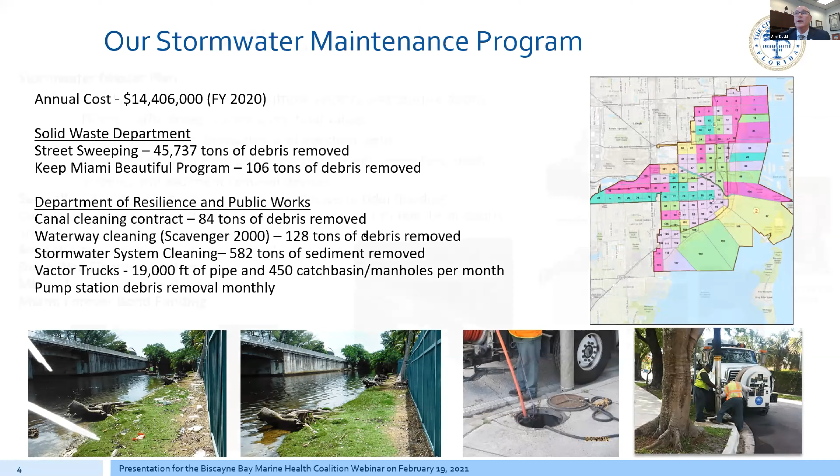So where are we going? The biggest thing is our stormwater master plan, which we're wrapping up right now, and we'll be holding public meetings to discuss it in the upcoming months. We need to redesign our stormwater system so it can capture debris, treat and attenuate pollutants as much as possible, and make sure whatever we're discharging is as clean as possible.

That will require us to change our standards for how we design pump stations and the entire stormwater system. We'll be incorporating filters, baffle boxes, vortex units, and tidal valves, all of which will help us capture debris and prevent it from passing through the system.

Exfiltration trench. If we can reduce the amount of water that is passing through the stormwater system through exfiltration trenches or deep wells, something that allows more natural percolation, that also helps to filter the water. And unfortunately, as we look at sea level rise and our future needs, we know that we're going to need a significantly greater number of pump stations.

Right now we have 13, and that number will go up significantly more in the upcoming years. So we need to design them so that they have oil water separators, trash collection systems, and most importantly, a way to slow down the water, allowing sediments to settle before it gets out to the water. That will be part of what we're doing.

And finally, I mentioned the curb inlet screens. Everybody remembers the fish kill event we had last summer, and that was an awakening for our city commission and our mayor in particular. So we committed, based on that pilot program, to fund 1,000 curb inlet screens to be put in our downtown area, which is where we have probably the greatest challenge of plastics, floatables and debris getting into our system. That's for $270,000 and will be completed by this summer. That's projected to capture a lot of nutrients that otherwise are flowing into the bay right now.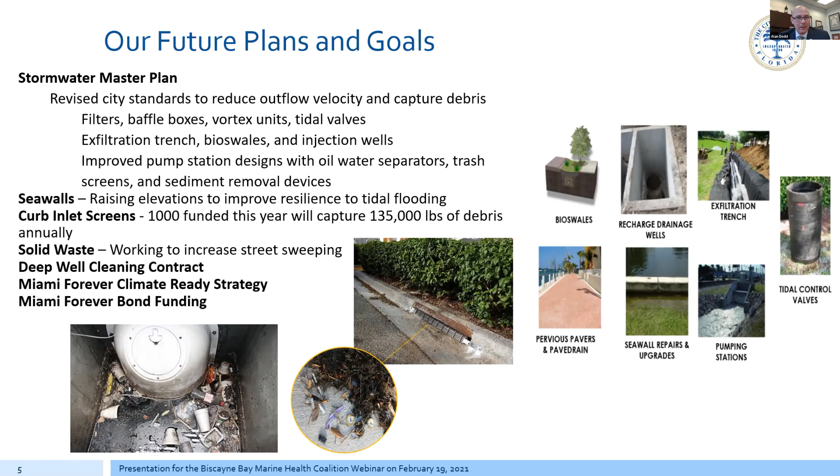So that is a very quick summary of our program, and I am happy to stop at this time and pass it back to you.

Alan, very good. Thank you so much. I applaud the efforts that you're making, and it is true that if we are going to keep the trash at the street level, then to avoid all the phone calls from the public saying, hey, why is there so much leaves and debris, why don't we get out here and clean this? You're just shifting resources from the more expensive in-pipe cleaning to the less expensive street level maintenance, where you can have automated trucks and even manual cleaning. So you're just shifting resources around. You're not just saying, because we're doing this, we no longer need to, we're all good, right? So very good, Alan. Thank you.

Thank you. Now I'd like to introduce Nelson. Nelson is with the city of Miami Beach, where I live and where I got my start. The city of Miami Beach has been working on their stormwater infrastructure program for about 10 years now. I'm excited to have seen the progress we're making here, and really just trying to set the standard for how not only cities deal with sea level rise and climate change, but also how we ensure that the water we put out into the bay is as clean as absolutely possible.

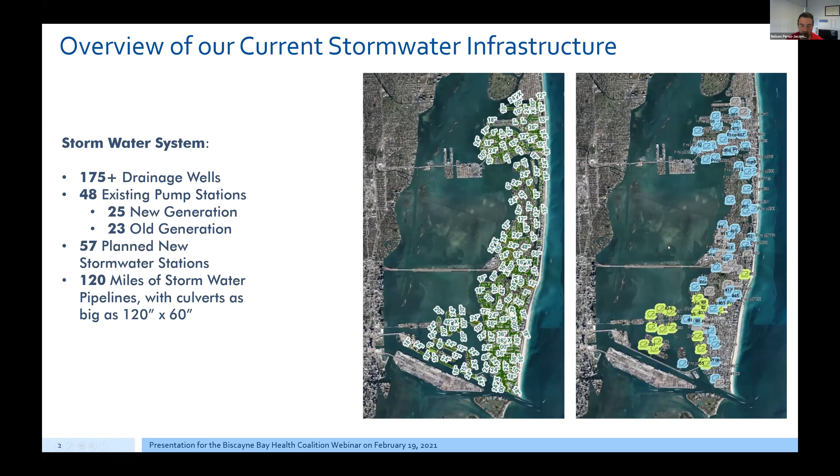We clean 190% of our system, that's the latest and greatest, every year. I've always said 150%, but apparently we've increased it to 190%. And just to put that in perspective, NPDES requires you to clean 100% of your system once every 5 years. So we're doing basically the entire system twice a year.

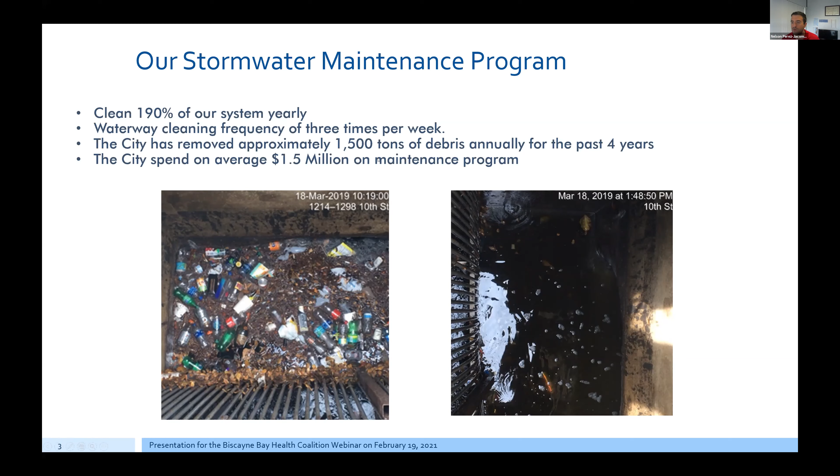We're definitely doing everything we can to keep debris and pollutants out of the waterways. We do waterway cleaning as well within the waterways - Collins Canal, Indian Creek, Surprise Lake - three times per week. The city removes approximately 1,500 tons of debris annually. That's been our average over the last 4 years, and the city spends about 1.5 million dollars on that maintenance program, just focused on removing debris. Obviously, we have a much more vast maintenance program for pumps and other assets that need to be maintained.

So our current strategy is what you see before you, but I'll give you a quick 5 minutes on our background of how water ends up in Biscayne Bay from Miami Beach. Before Miami Beach was ever urbanized, back when we were just a wetland marsh, water would drain from east to west, always towards Biscayne Bay. That's because the high point is Washington Avenue - if you don't know where that is, it's pretty close to the coast.

As Miami Beach started urbanizing, we started building drainage systems. Those drainage systems were largely gravity-based, and that became ineffective because of sea level rise and climate change. So we pressurized those drainage systems, and it evolved over time. We started adding bar screens and pollution control. Anytime we have a pump station, we achieve aeration by the pump itself, as you see there, and floatables separation at the wet well.

Our latest and greatest strategy is to implement stormwater wells in combination with the outfalls. That's because one thing's a fact: stormwater wells are not capable of handling water quantity, but water quality is extremely important as well, and they're excellent at achieving water quality. So if we combine the two, we achieve both water quality and water quantity. That's engineer talk - FDOT looks at water quality and water quantity. But that's our current strategy, and it's something we're implementing right now.

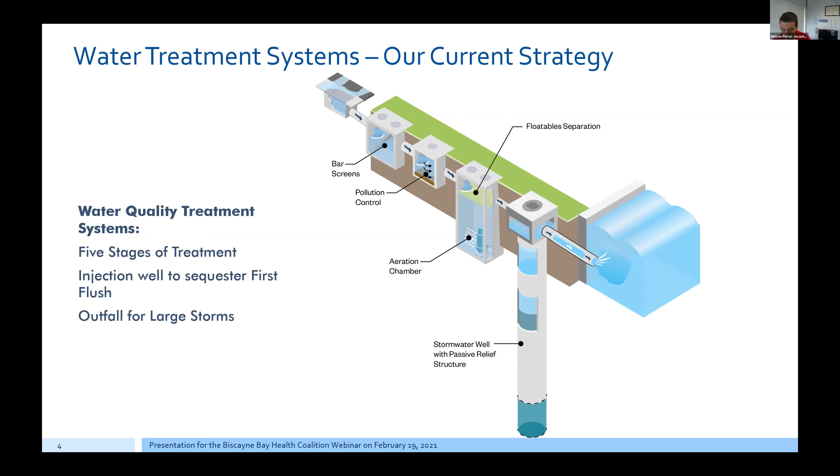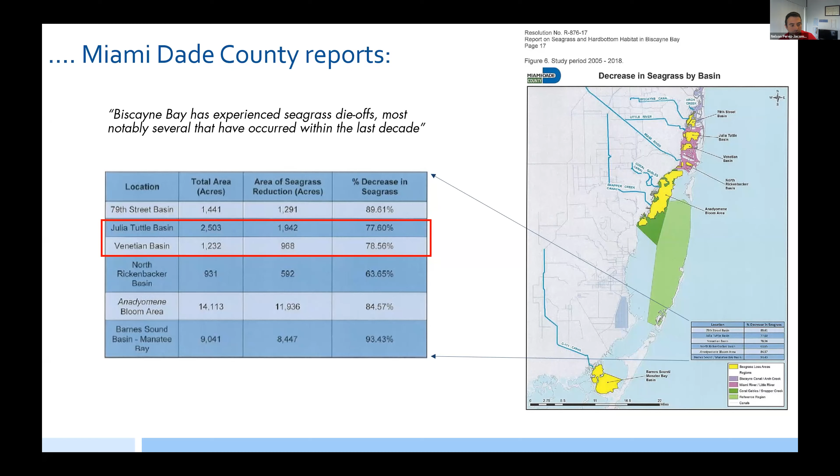The last thing I wanted to share in our presentation is we did a study, and we're very proud of this study because we wanted to know what we can do to help Biscayne Bay and where the real problem lies. What we found is we're definitely going to keep doing everything we can to limit nutrients, but the vast majority of the problem in Biscayne Bay - you'll see here the highlighted basins, Julia Tuttle Basin and Venetian Basin - is related to nutrient loading from the canal system. Now, we don't know what the culprit is. It could be upstream, it could be coming from outside of Miami. All these canals are connected to Lake Okeechobee.

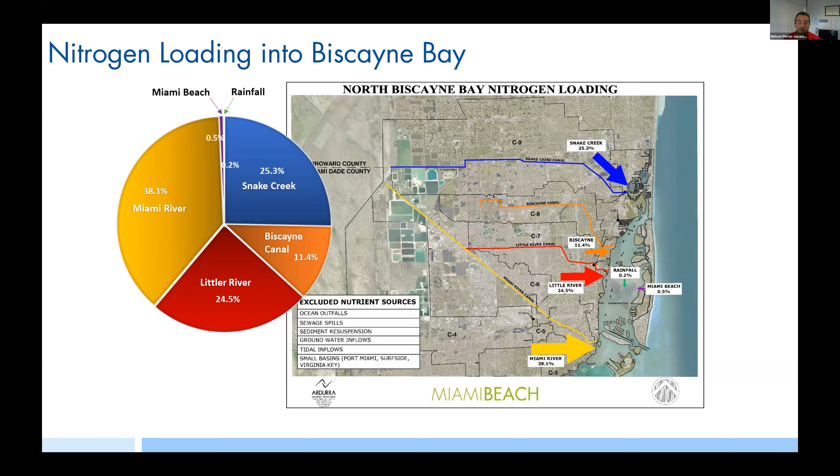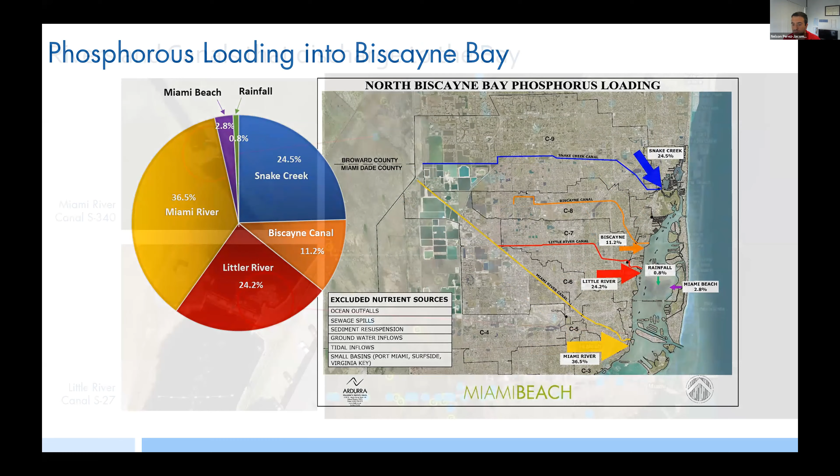Or it could be within Miami - we don't know the source because we were trying to figure out what is actually harming the bay. But what we found is Miami Beach, and probably the City of Miami or our other neighbors as well, we don't move the needle on the bay. The fact of the matter is, we can do all we want with nutrients, but it's a point of diminishing returns. We should still do whatever we can, but what we've got to fix is the loading of nutrients from the canals. The last slide was nitrogen - this is phosphorus. We're 2.8% of the phosphorus loading, barely anything. These are just some screenshots that we've shared with the Biscayne Bay Task Force when we presented.

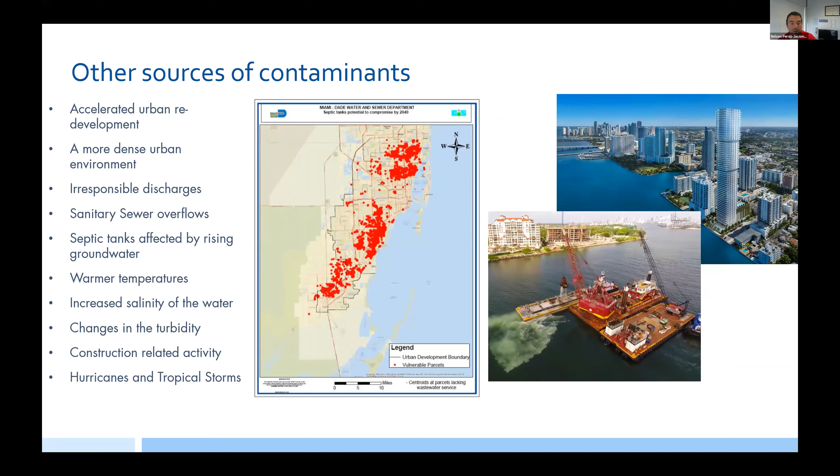And like I said, we don't know the source. We do know that septic tanks could be a potential source of nutrients leaching into the groundwater and then affecting the canals. It could be agricultural, but if we want to fix the bay, that's what we got to do. We got to fix the nutrient loading from the canals.

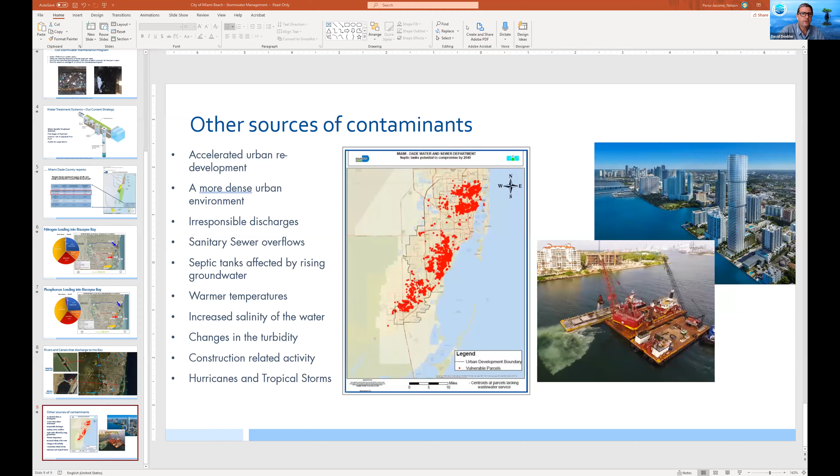Excellent, Nelson. I think one of the things you highlighted in your final slides was the importance of making sure everybody is doing their part. We have 33 co-permittees who all ride along on our MS4 permit, and we're all responsible for doing our own job and submitting our own reports. So I think an important thing to note is that even though City of Miami Beach and City of Aventura, when they are doing their jobs perfectly, that represents a fraction of the totality.

So we are at 10:30, but I'm going to continue the conversation and hope that, because I've got a couple of questions I'd love to open it up to any of the public works folks, Alan, Anthony, or Nelson. What questions should elected officials and citizens be asking of their public works teams to determine if they have a good stormwater program? What should I, as an activist, be asking you guys?

That's a good question. I would say, do they truly understand the flow of trash and debris and how funding of different areas comes together to create a holistic program? A lot of times when we talk to them, it's being more reactive to a resident complaint or a specific issue, but I don't know if they really understand the whole process. And that's education on me and all the public works teams, to help them understand how they need to fund us in certain areas.

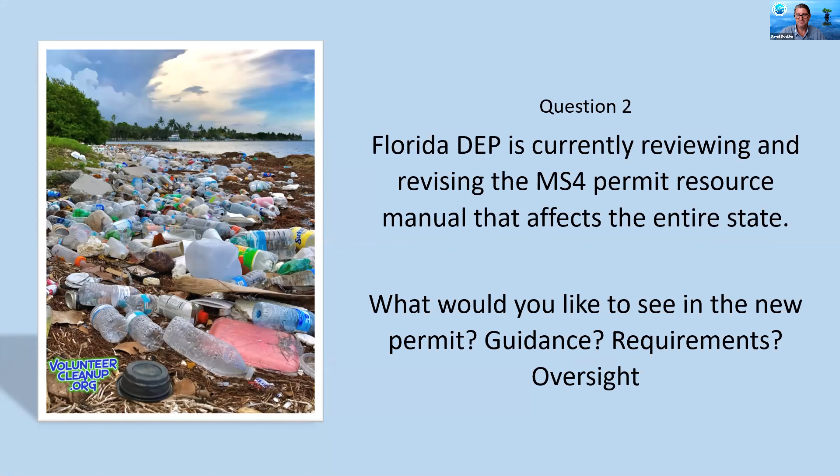If not, how do we as a collective learn from each other and benefit from our shared experience? Well, I'll say from the city of Miami perspective, we have a lot of collaboration and discussion with Miami Beach and the county, which is great. But we don't have a whole lot of collaboration with the other municipalities in Miami-Dade. We probably need more forums, maybe quarterly, to share ideas and concepts, because there's not enough exchange between all of us, and there's a lot of great ideas out there.

Dave, can I just jump in there for a second? Absolutely, always. I just want to piggyback on what Alan said. We have Resilient 305, where the city of Miami Beach, Miami, and the county are currently working together, and it's also a call to work with all the municipalities. My plan is to include a Biscayne Bay water quality agenda item in future meetings with all these participating municipalities, since they're already meeting and discussing other issues related to the resilience of our region. So we may as well address that at that point.